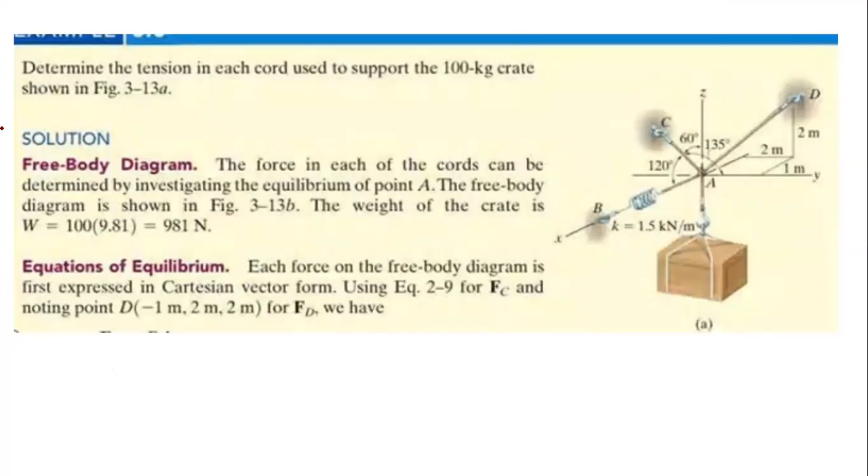So this assignment is similar to the first one. The first problem - what we need to do is come up with a system where we could identify the forces.

For example, here you can see this is the y-axis. Take note that going here is positive, here also is positive, and going up is also positive. So we have y, x towards us, and z going up.

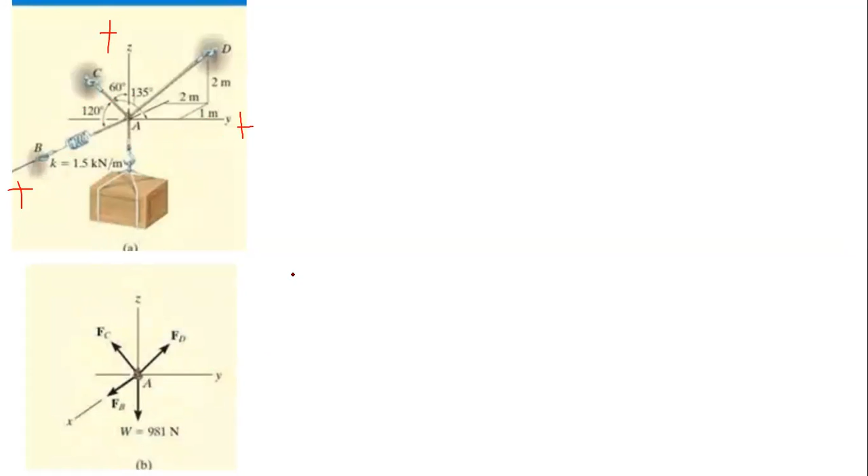Okay, so looking at the free body diagram, you have FC, FB. Going this way you have FC, FD, FB, and going down as the weight.

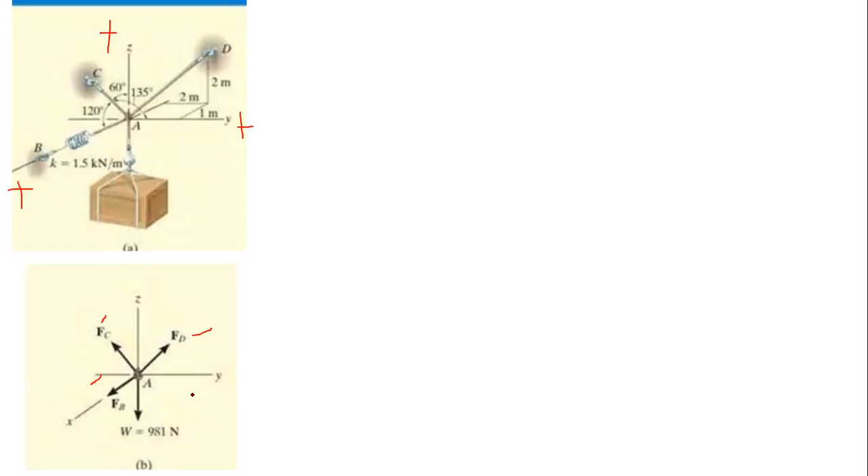So as you can see here, FB, where is FB? This one is going along the x-axis. FB, i, with 'i' as notation for vector, since we have x, y, z axes with vectors i, j, and k. We write i to know that this is along the x-axis, and this is to know we are using vector notation.

Next, for the force FC, for i, which is the x-axis here, the angle is 120 degrees - see this one, 120 degrees from the x-axis. So to compute the x component, you multiply FC times cosine 120, because that is adjacent - FC cosine 120, i, going towards us in this direction, so that means this is positive.

Then for j - where's j? i, j, k, or x, y, z. The given angle is 135 here, see, from here going here, that arrow. It's 135, and since the axis is going here at 135, we can use cosine positive - cosine 135, because we take the angle of 135 referred from this axis, so it's positive. Then cosine 60 along the k component - what is the k component? This is the z component, it's clear, it's here. 60 going here, so it's just FC cosine 60, all cosine because it's adjacent to the side of the component.

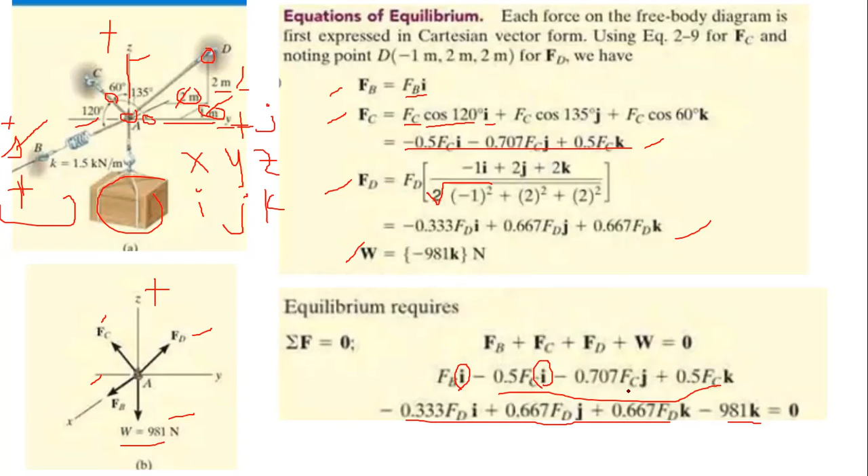Okay, so once we add that, we just copy this negative one for FC. Of course FB is here, FBi, so we copy it here, FC, and then FD is also here, and then W. Once copying it, we combine those which have i, meaning along the x-axis or x component. So we can have this for x or i - FB, this FBi, 0.5, this FC, and another one. Also for y, or those with j, you have 2, FC, and FD. And FCFD, this is for z or k. We combine all the signs and equate to 0.

So here we can express FC in terms of FD - see here, equation 2, for FD in terms of FC. So we can substitute and compute FC in terms of FD. We just transpose, negative 0.707 will become positive, and then we can compute.

And once we compute FC in terms of FD, we can substitute it in equation 3. This is equation 3, it's here - see, this one is FC. We can substitute FD, so in other words we can compute FD, which is now equal to 862. And then FC is 813, and the rest.

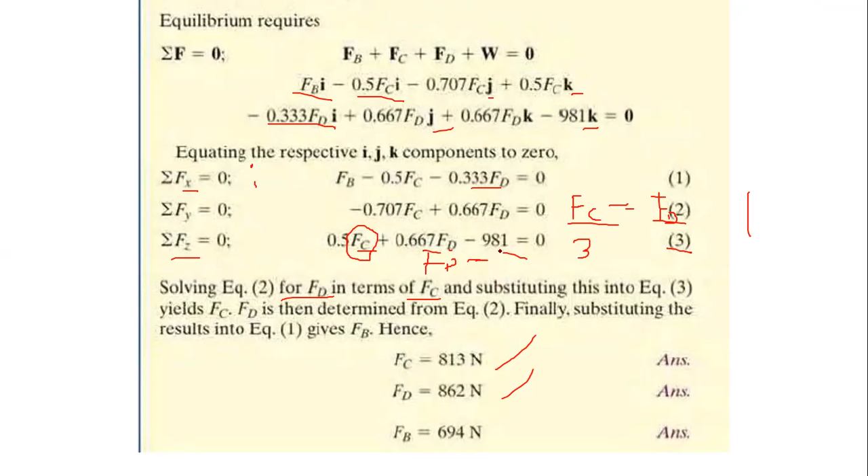Oh, Sir Ruben, good afternoon. Good afternoon, sir. Good afternoon everyone. Good afternoon everyone, okay.

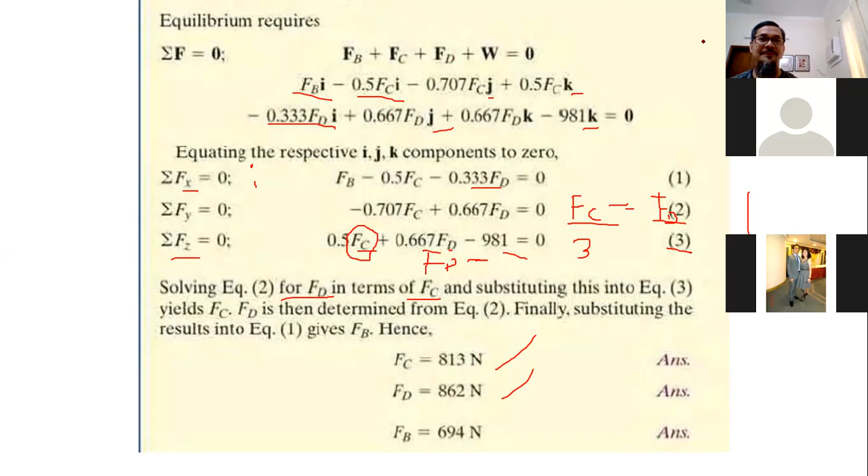Okay, so I'll continue with my discussion. We'll formally start with our discussion now on friction. So we are done with forces and equilibrium. Now we are on friction. Simply, friction is the opposing force to the movement of a body. That is because the surface may be rough, and the contact between the surface and a certain body is being described by a coefficient of friction.

The surface, meaning the coefficient of friction is lesser. You have a bigger coefficient of friction if you have a rough surface, meaning there's a big opposing force. So meaning if your body here with a weight of W will move to a certain direction to the right, then the friction force is going to the left. And then of course, there's a normal reaction that is dependent to the weight of the body.

This normal reaction is always perpendicular to the plane. In other words, if you have an inclined plane, as we discussed earlier in the first meeting, we have a free body diagram. We have your W. The normal reaction N is coming here, which is always perpendicular to the plane. And if this plane has an angle of theta, it follows that the normal force has an angle of theta, which is exactly the angle of inclination with respect to this vertical axis. So if this is the body, normally the body will move downward, so here the frictional force is here.

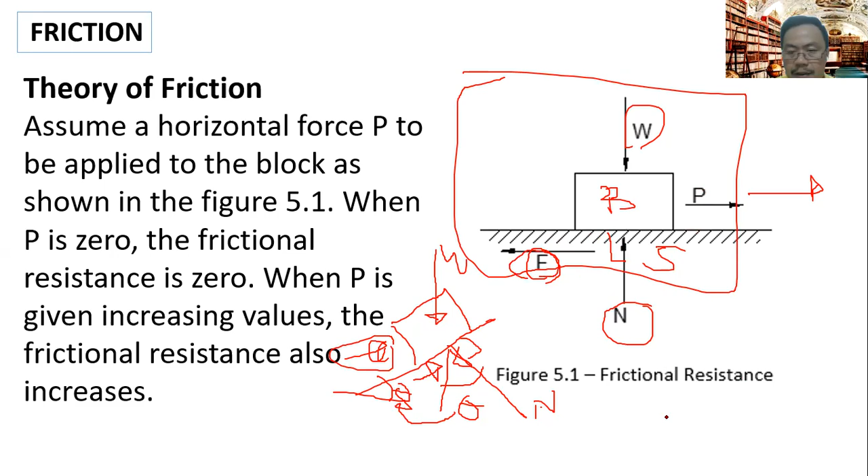So what is the relationship of the forces? As you can see here, theta, or the coefficient of friction, is always... and refer to the normal force. So taking into consideration these forces, as you can see here, this W, this is normal, and this is F because it's opposite direction. Your P is going to the right, so basically your F is going to the left.

And if we are going to form a triangle, this is the same as F, okay? By the trigonometric functions, you can have tangent theta is equal to the opposite, which is F, over N. And tangent theta has the relationship equal to coefficient of friction. So in other words, you can have this relationship, or you can equate it here. It's always that your frictional force, when you equate it, this coefficient of friction, is always directly proportional to your normal force. In other words, your frictional force is proportional to the normal force.

Again, your frictional force is directly proportional to your normal force. The heavier is your weight, which is equal to N in this case, the bigger is your frictional force also. Now, depending on the coefficient of friction or the contact between two bodies, if your coefficient of friction is big, your frictional force is also big. If your weight is big, your frictional force is also big. So, meaning they are always directly proportional.

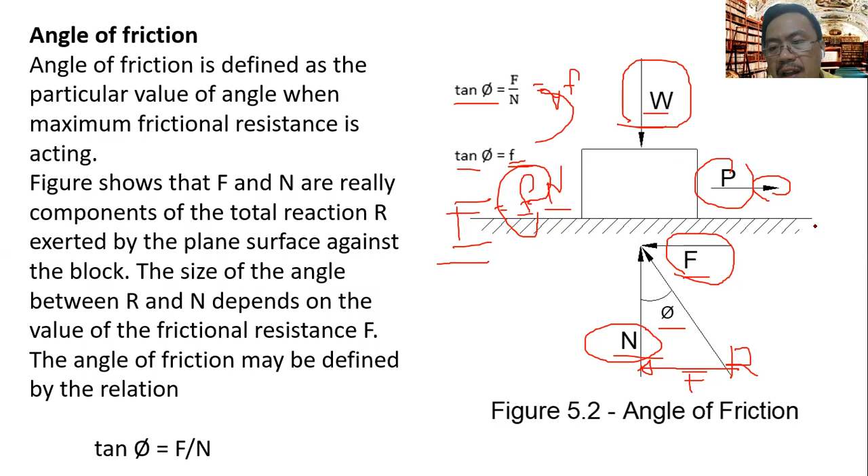It will be difficult for you. You will need a bigger value of your P to push or to pull a certain block, especially if your F or coefficient of friction is also big, much more if your weight is also big, because it's directly proportional. And in this case, P is equal to F. So let's move on.

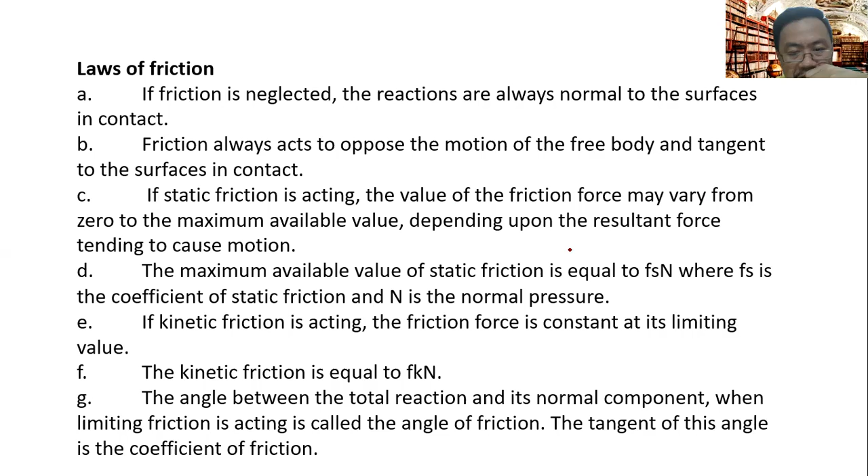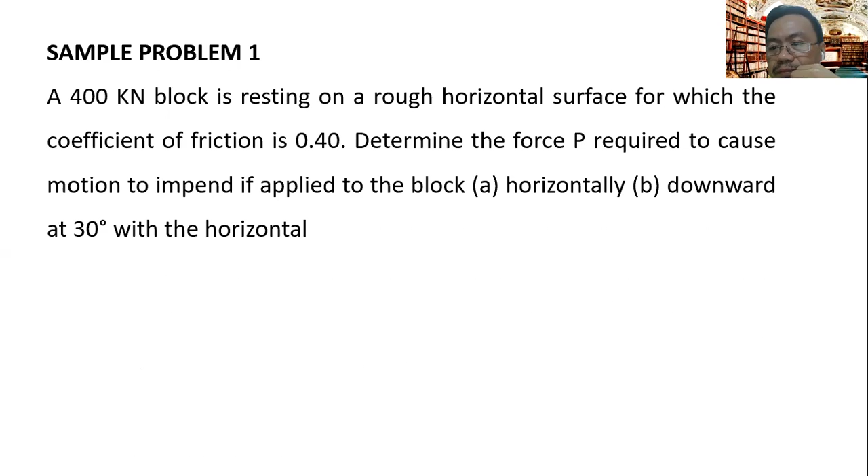There are some laws of friction that you have to take note of, which I already discussed. I just want you to visit our slides, read it, and understand what I have discussed is all in the slides. So, problem number 1. By the way, before we start, any clarification? Okay, silence means no clarification, no question, okay? All right, thank you.

So you have here a 400 kilonewton block resting on a rough horizontal surface. Rough horizontal surface—when you say rough, meaning there is friction. 400 kilonewton block.

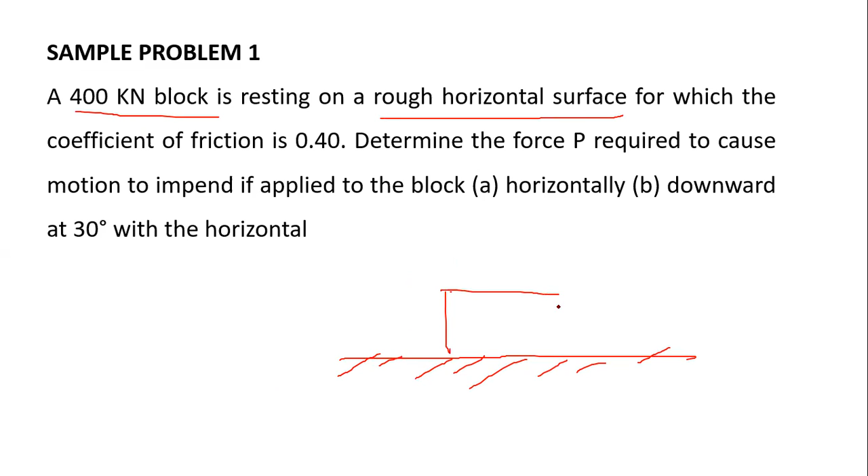So the coefficient of friction here, F, is equal to 0.4. This will tell us about the contact between this block and the surface. Now determine the force P required to cause motion, to impend or to move. So what will be the force here, horizontally first.

The other case has an angle of 30 degrees, like this one. So first question is horizontal, second is with a 30 degree angle. This is the figure already, as you can see here. So the question is, what is the value of P?

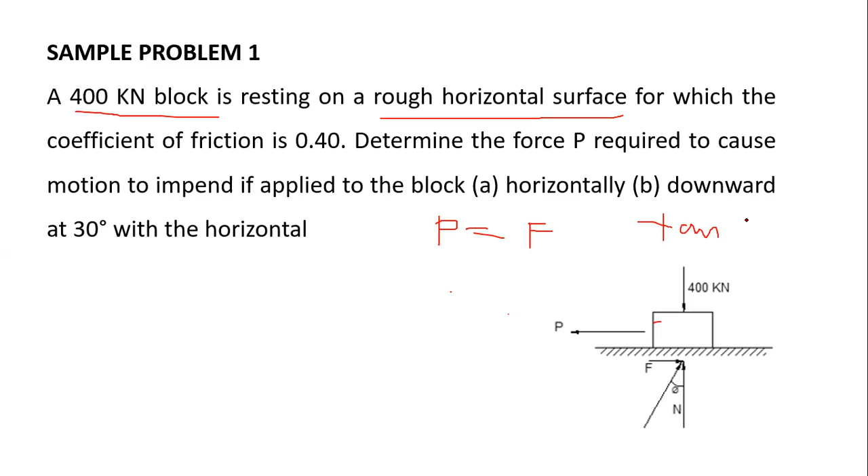From the figure itself, it's easy because we can compute P if we have F. We know that tangent of the angle is equal to F over N, which is also equal to the coefficient of friction. F is equal to 0.4. So when N is 400, we substitute the coefficient of friction 0.4, then we can compute F is equal to 160.

Therefore, summing forces horizontally, it's very clear P is equal to F. So therefore P is equal to F, which is equal to 160 kilonewton.

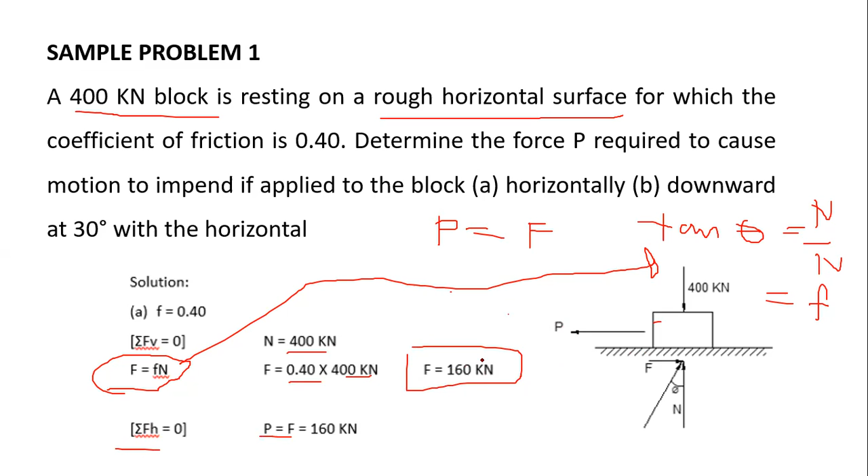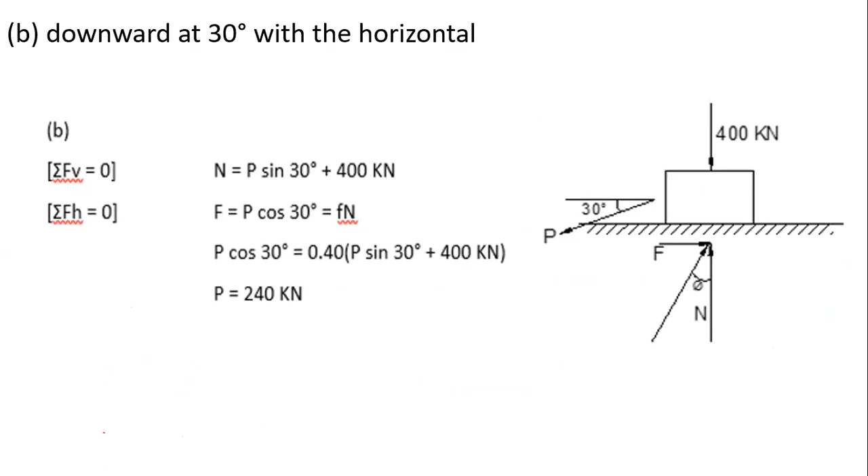Now, how about when P is downward at 30 degrees? What is the value of P? Same thing, we just sum up. N has 400 kilonewton downward, and P also goes here at an angle, similar to sine 30. This part is just P times sine 30.

Going up, summation of forces vertical. Going up as positive, equal to going down also.

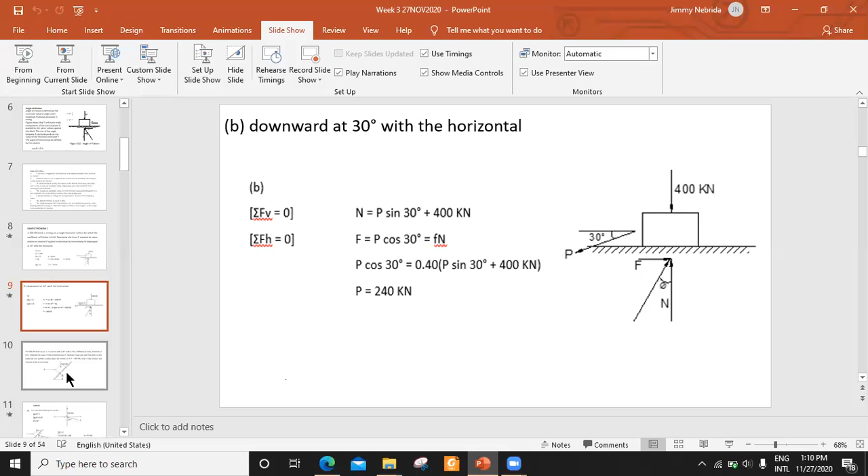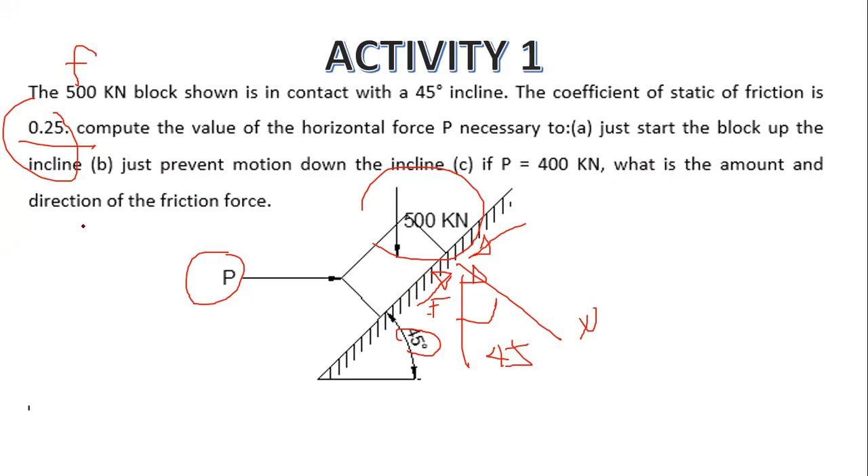Letter B, just to prevent motion down the incline. If you just want to prevent the block from moving down the incline, so the force may be here. Then, if P is given as a certain kilonewton value, what is the amount and direction of the force, or you just have to compute the resultant friction force. So I want you to answer this one.